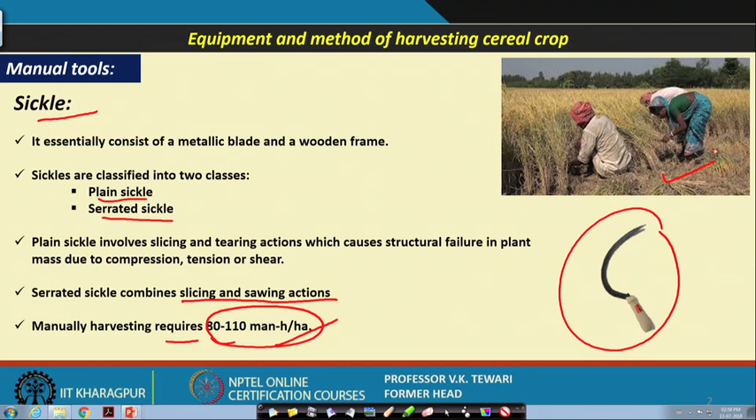That is why it was worth showing you here, and we have given a photograph of how the ladies and gents, how the people, in what posture they are operating. These are very arduous postures, but they have been used, and are still being used in some locations in the country and some other places.

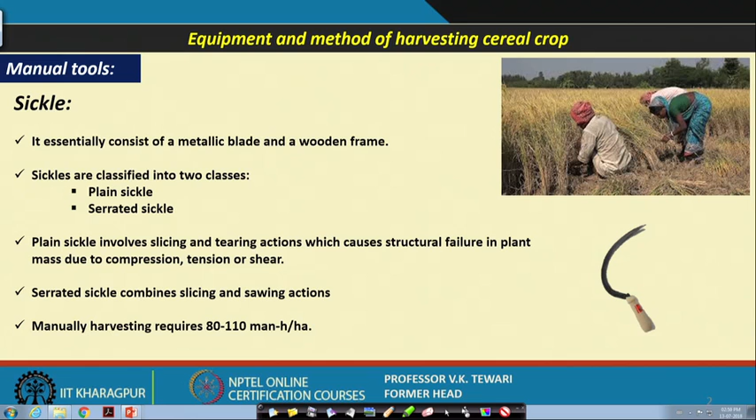This is mechanical equipment which I had shown you earlier, a device which saves a lot of energy. As I said, these tasks require very high energy if done manually, so that is why we have such equipment available.

Now, these reapers are nothing but reaping the crop. As you sow, so you reap, you must have heard. If you have a good crop, you are going to reap a good crop. That is why the name of this has come as a reaper.

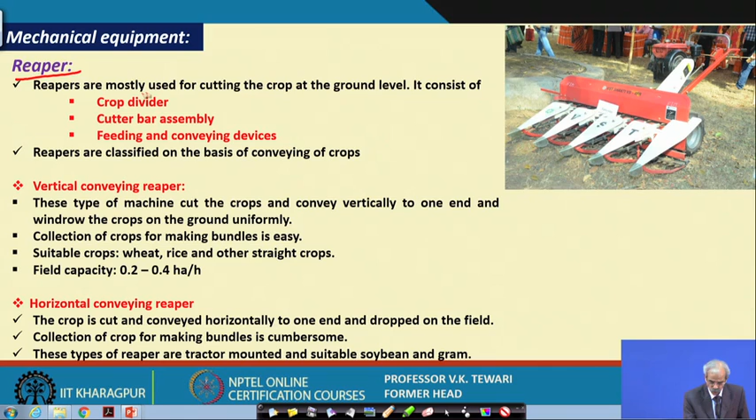You can see that this reaper mostly cuts the crop at ground level, very close to it. The details of this include a crop divider, a cutter bar assembly, and feeding and conveying devices. These are classified into two types.

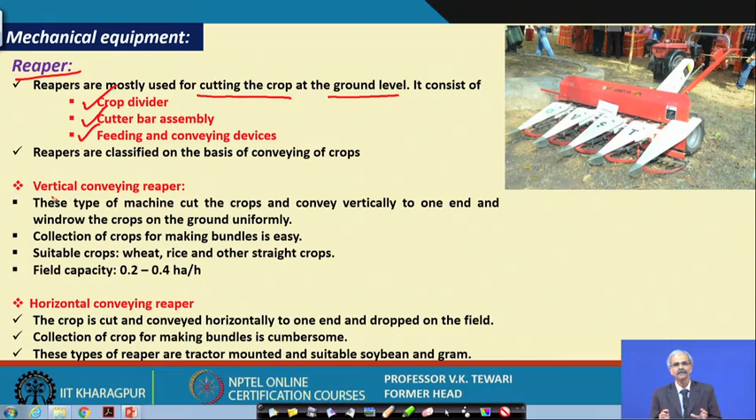When the crop is standing and it is cut, generally manually what we do after cutting is small bundles are made and put by the sides. So bundles are made and kept. This job is done by the people.

Here the vertical conveyor, after cutting, moves and windrows the crop. This is known as windrowing. So after cutting, it windrows the crops on one side of it.

This is called a vertical conveyor because the crop after cutting is conveyed in a vertical action and then falls on one side. In some other situations, horizontal conveying is also done. Some crops are bush type, for example soybean or gram, and these can be cut and horizontally conveyed. That is why there are two types of such reapers available.

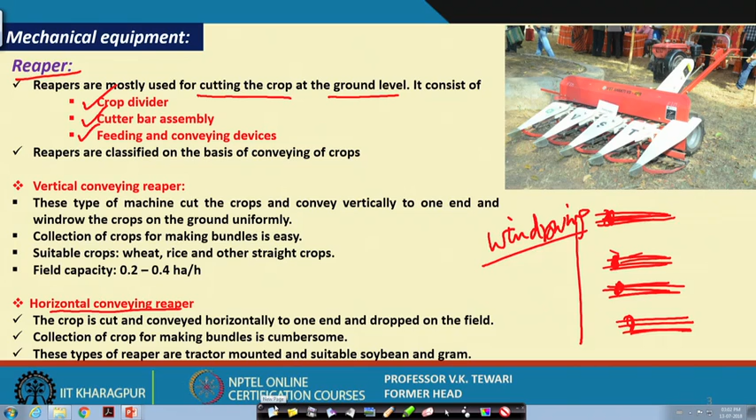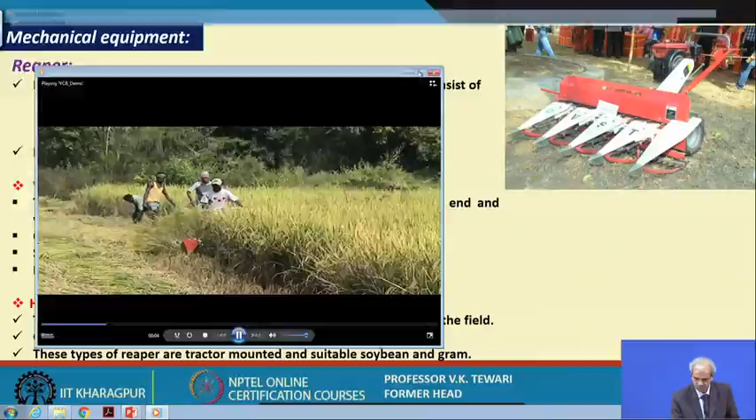Now we can have a look at the video of this, to see how it works.

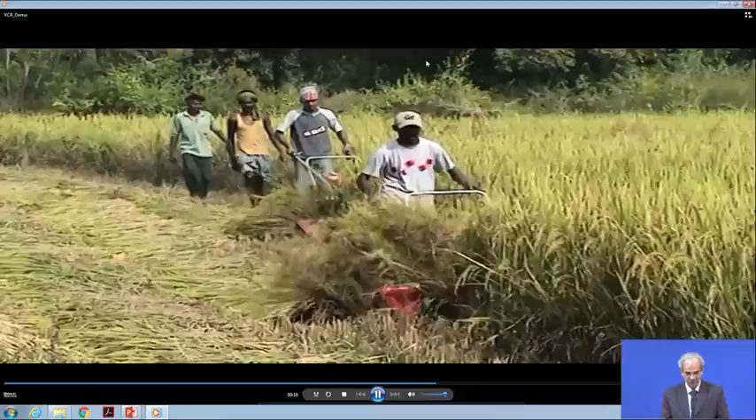The windrowing is going on properly, as we have said. You can see there are two machines being operated, so the work is faster. You can see here that two persons are operating, and they have been used effectively for so long.

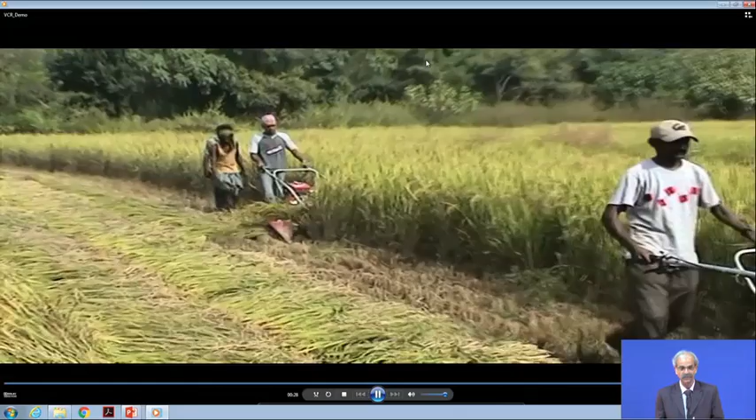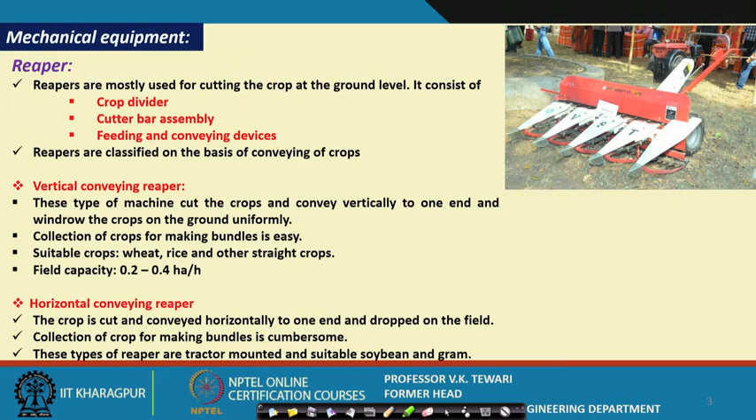Now, the problem with these is that they are just windrowing. There are devices where only windrowing will not do. We would like that after windrowing, small bundles are made, as it will be easier to collect and carry to the farmyard.

So the farmers expressed this need, and another machine came up known as the reaper binder. The field capacity, field efficiency, all details are given, and this machine simply does the job which was not done by the earlier machine. Although it has some weaknesses, it is still used extensively.

This will do the job of binding also, so the cost is slightly higher, but still if you have people, both machines can be used. Let us have a look at this as well.

Now, another one is the stripper harvester. Sometimes you must have seen the crop has a stem with grains on it. With a stripper, this portion is simply stripped and threshed, taken from the top, so when taken like this, the whole plant is left and only this portion is taken.

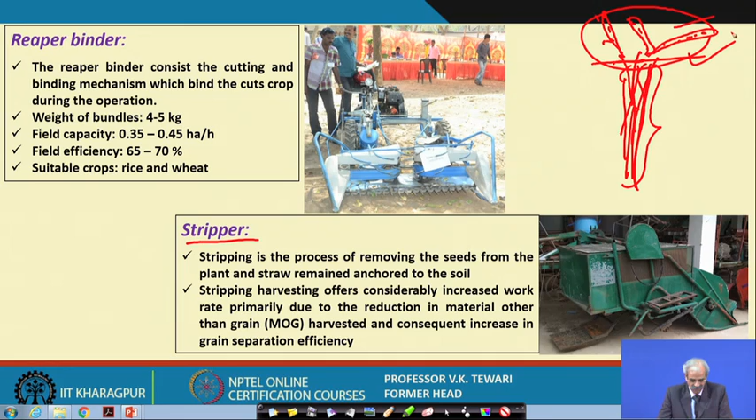Later on, these plant portions are cut and left in the field itself to conserve moisture. They are not very popular now, but this is another type of device available. We had one at IIT Kharagpur from the Philippines about 15 years back. These are known as stripper harvesters, which strip the cob parts where the grains are.

We will have a video of this reaper binder, so you can appreciate that after cutting, in the earlier case it was simply windrowing and not putting small bundles. This is done here, so let us have a look at this.

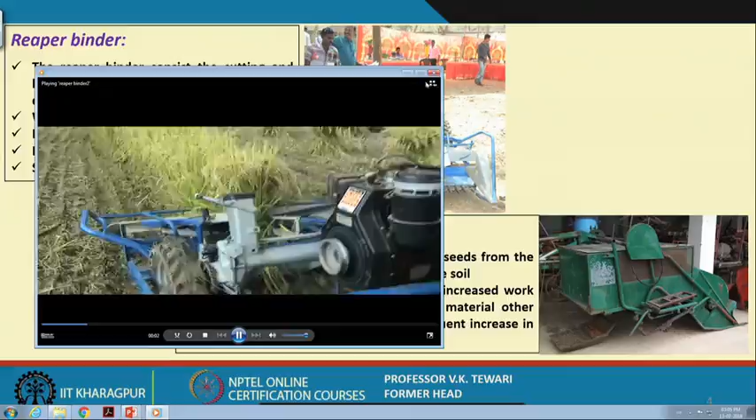Now have a look at this, how the whole thing is being performed. You can see the bundles being made here. If you see the back from this side, the bundles are being made, so it is easier for the farmer to collect these bundles and then transport.

This is one which is above that, and the cost is slightly more, but it is available in the market, and depending on the requirement one should go for it. If people are not available, you will have to go for this machine, because people are not available even for lifting. So these are the machines I said, particularly the reaper binder and the stripper, and they are also available and being used.

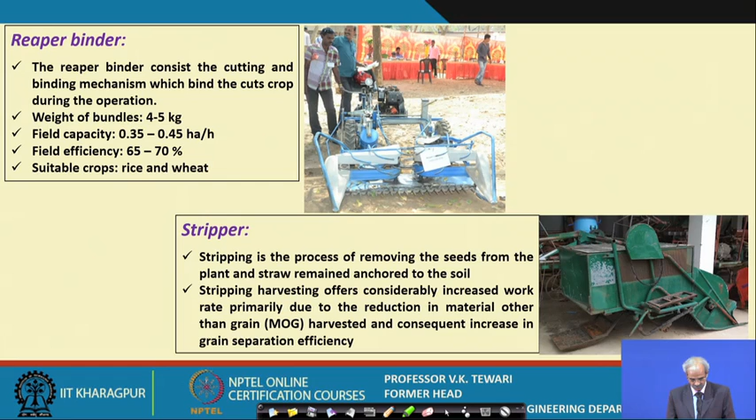Now for equipment for harvesting root crops. In the earlier two, we talked of cereal crops, and generally there were two types which are very important. Now when we talk of root crops, that means crops which are actually bulbs, just like potato, groundnut, sugar beet, and even carrot. They are all below the ground.

So when you need to harvest them, what are the things required? The root crop harvesting basically performs the following operations. Digging will be there, dug up to that level. You should dig it to the extent that it should not cut. If it is in this posture, supposing a carrot, and digging is at this location, then this much material will be left inside. So proper digging has to be such that the whole material comes out, and if potatoes are there, it must be below that, so that every amount of potato is taken up.

This is important. Then separating the loose soil from the small clods and stones. If this is the level at which the plant or the potatoes are there, then we have to cut it from here. All this soil should be removed from stones, so you get clear bulbs of potatoes or sugar beet or whatever, or weeds, and separating them in different sizes.

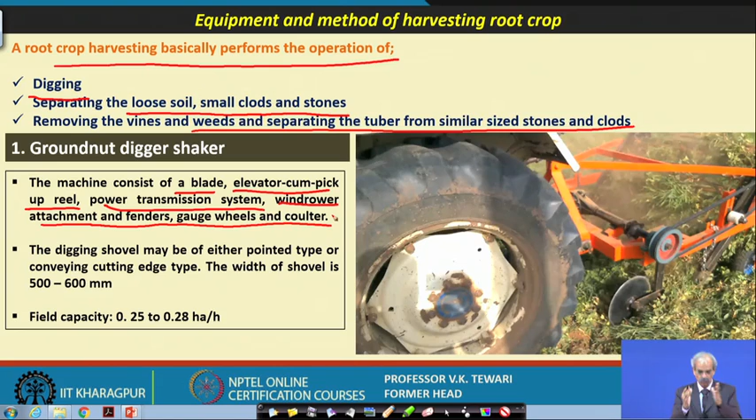Now the width of the shovel varies from 500 to 600 mm. This depends on the type of design you have and the power source that you have. You must try to match the requirement of the machine or the size of the machine as per the power. We will discuss in subsequent lectures how to match the power of the power source with the size of the equipment, which is very important, so that you can utilize maximum power of the power source.

The field capacity varies from 0.25 to 0.28 hectare per hour. So roughly within 4 hours or so, 1 hectare area you can do, and if you have to dig about 1 hectare manually, you will require many people, about 100 people or so, and this is a very strenuous task. So these are equipment which are already available. We will have a video of this and see how it works.

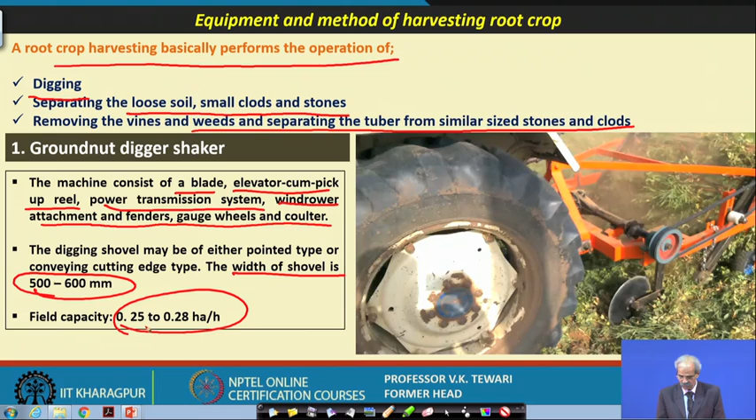Now, you can see how it works here. The whole operation is seen. This is the ground. You can see the bushes etc. are there, and then the whole thing will be picked up and maybe cleaned, and then groundnut threshers are available.

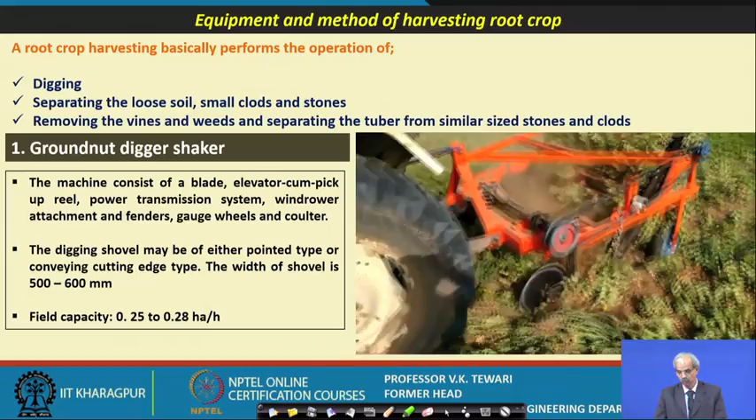We will talk of that when we come to that place, in that lecture, and those are then actually removed. So, this is the thing. You see the operation. You should appreciate the point of view. Yes.

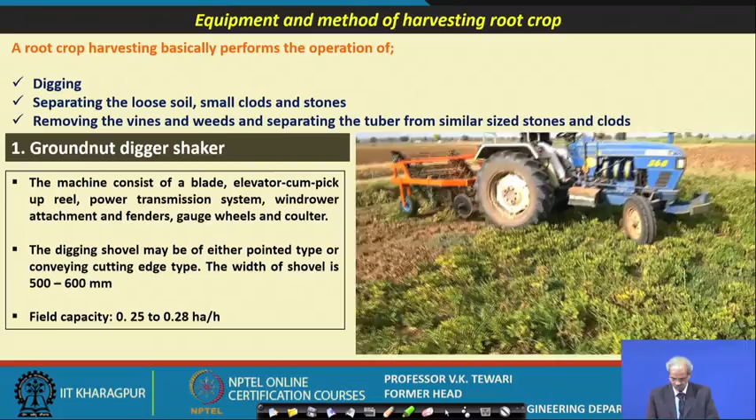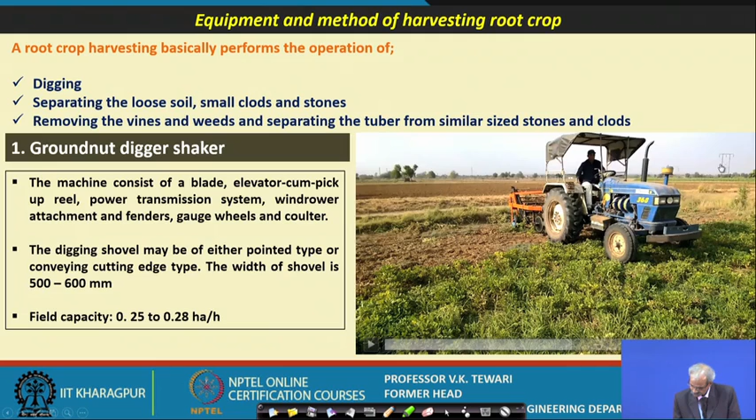Now, potato. As I said earlier, you can think of the groundnut similarly for potatoes. Manual harvesting of potatoes requires about 800 man-hours per hectare. It's not possible that you get so many people for doing this particular operation, and it has to be done at the right time.

Otherwise, you will lose the potatoes which are there, and many times we find that these potatoes, if they are not harvested, they have to be thrown, and even harvested potatoes, if they are not properly preserved, then after some time they lose their value. So, it is very important that they should be harvested properly, and they should be stored in the proper locations where they can be stored for some more duration of time.

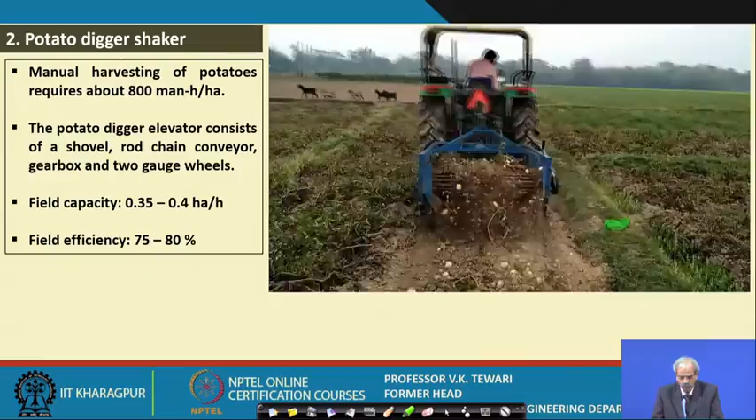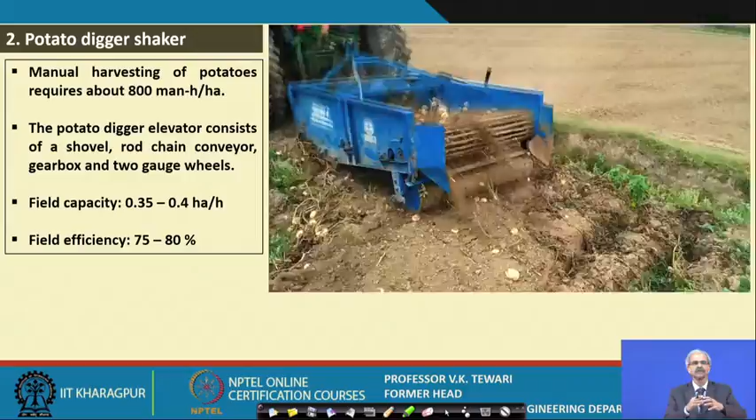Now here I must tell you that depending upon the capability of the person, a poor farmer may not be in a position to purchase these big machines. They are not very big, but now the concept of custom hiring has come up. A group of farmers can come together and purchase these machines and use them for their own requirement, as well as give them on rent and earn some more money. The field efficiency of such machines is about 75 to 80%. So, these are some of the devices which are being used, and they are worth having.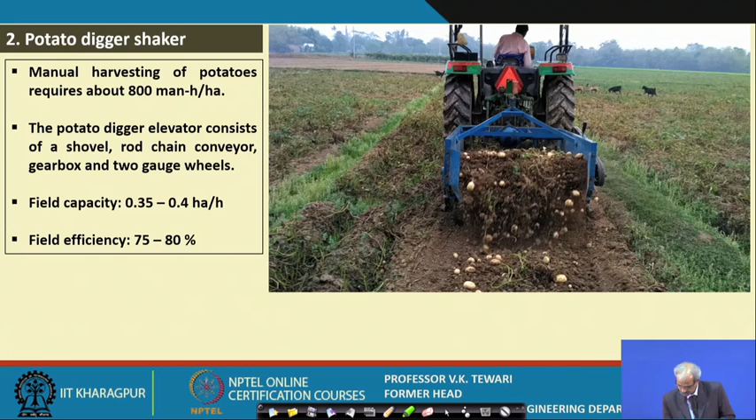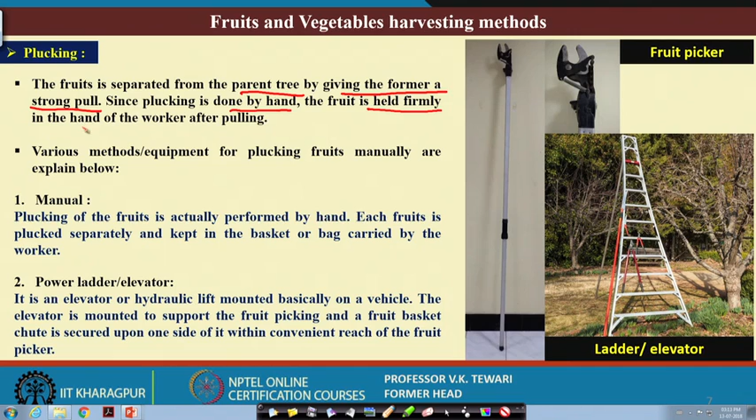Fruits and vegetable harvesting mechanisms and methods. As I said, plucking is important here. The fruits are harvested from the parent tree by giving a strong pull. So, the plucking is done by hand. You can see that the fruit is held firmly in the hand of the worker after pulling. Otherwise, it will fall on the ground.

Once it falls on the ground, the fruit is spoiled, because physically you may not see it at that point of time, but the inside tissues get hurt, and after some time, when the temperature and relative humidity conditions are not favorable, it will start deteriorating, and if you cut the fruit after that it will not be fit to be eaten. So, this is difficult.

Similarly, manual plucking of fruits is performed by hand. Manually, you can pick up each and every mango. People go into the tree and pick up the mangoes and carry them in their small bags. This is one way, but how do you get so many people? It's not possible. So, various types of ladders have been made, as you can see here.

We showed here earlier this device, and you can see that with this particular device, people can go onto it and reach that location. As I said, tractor drawn platforms have also been designed and used. You might have seen them at some locations, and these are available for plucking of these fruits. Sometimes, by shaking also we try to take the fruits.

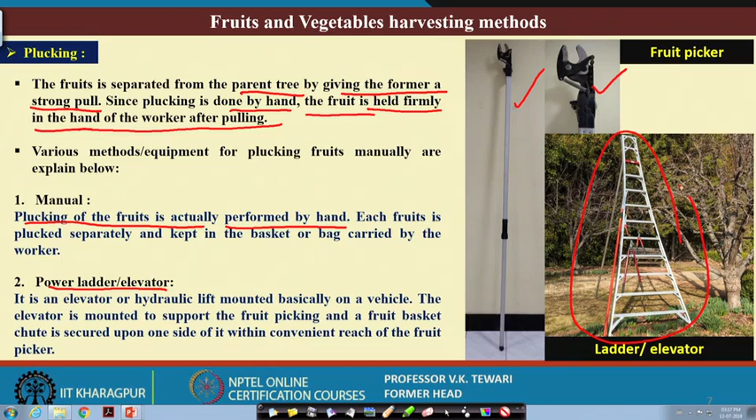We have talked of fruits and vegetables. Vegetables should be as fresh as possible. So, maybe you can have e-carts where you can cut or harvest the vegetables which are available, put them in e-carts, and then take them to the market, or store for a day or so and then take them to the market, depending upon your requirement and the requirement of the market.

And many people have done this. In fact, people are making good business out of the e-carts which have been designed for fruits and vegetables. People are growing organic fruits and vegetables, and they are using such devices which are available to them.

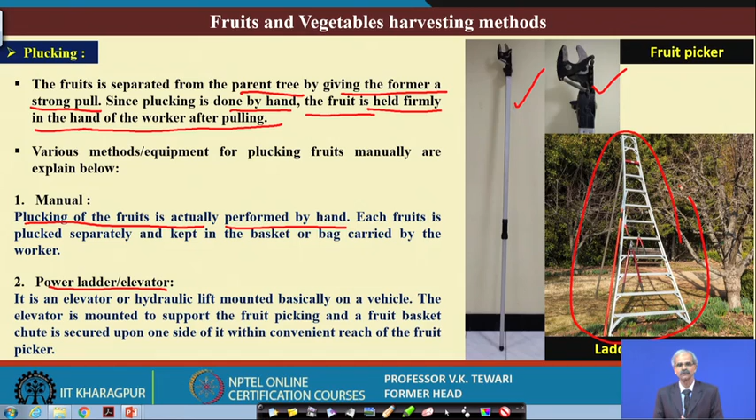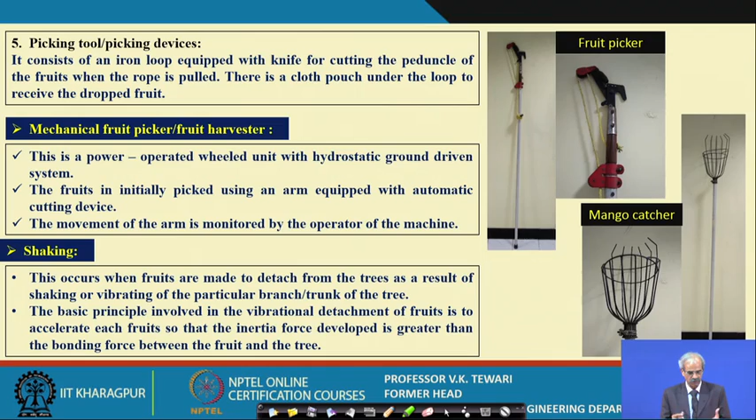Well, these are the devices which we were talking of, for mango. You can see here that a catcher is given, the fruit picker, and another device. Now, mechanical fruit picking, fruit harvester, shaking, as I told you, all these devices I have already described. We have given you here some write-up which will help you in understanding them instead of hunting anywhere else. When you go through this video, you will have this material with you. If you require more details, you can go to books or other literature.

We have picked up a problem for you, so you can see how these are used. The problem is: a vertical conveyor reaper with 1.4 meter width travels at 1.5 kilometer per hour. Loss of time proportional to area equals 1.5 hour per hectare, primarily due to turning and adjustment of the machine. If the other losses are neglected, calculate the actual field capacity of the machine. A very simple one, but it makes you think how you will go about it.

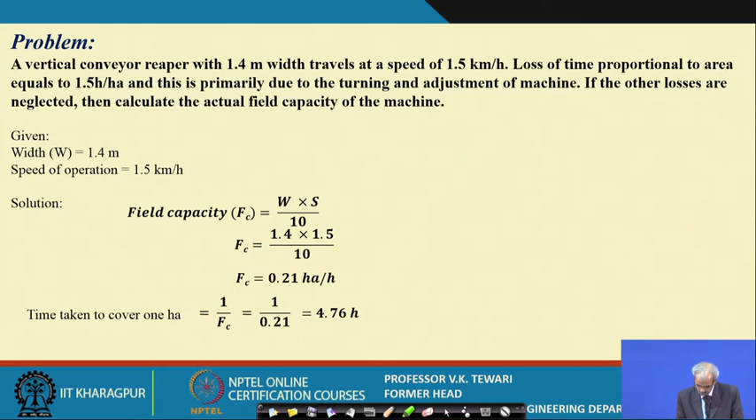The field capacity is W S by 10, where W is the width of the machine in meter and S is the speed in kilometer per hour, which gives field capacity in hectare per hour. Using this you will straight away get this, and the time taken to cover 1 hectare is 4.76, just the reverse of this. Now, you have been given that a certain amount of time is lost. So, field efficiency is based on theoretical time.

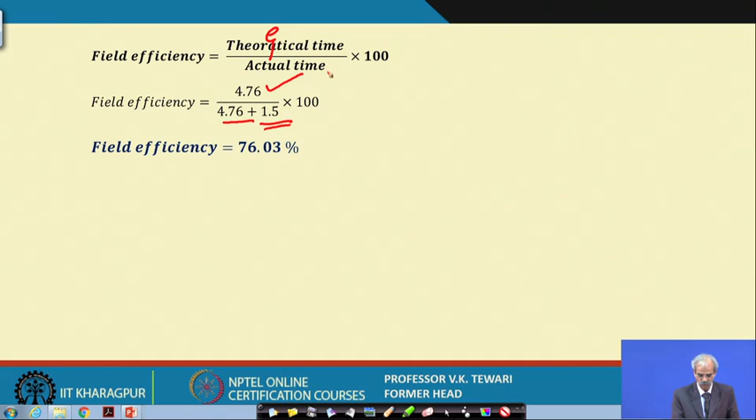Now, there is a mistake here. This is E, theoretical time by actual time into 100. The theoretical time we have worked out, but the actual time will add up the time which has been lost, so you must add this. Once you do this, you get the actual time. So, with actual time and theoretical time, the field efficiency is this. This is what was asked of you.

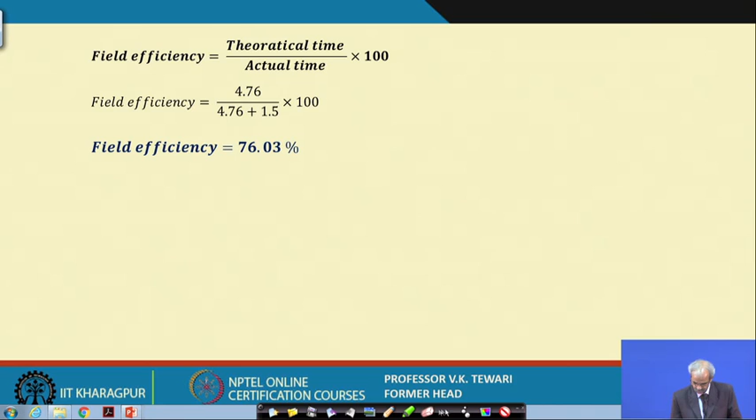Now, another problem has been taken to make it slightly more clear. See, a living alfalfa stem of 2.5 millimeter diameter is loaded horizontally at a distance of 30 millimeter above the soil surface as a cantilever beam. Now, based on the entire stem cross section, the modulus of elasticity is given as 1500 Newton per millimeter square, and the ultimate tensile strength is 35 Newton per millimeter square.

Now, we need to calculate the horizontal force that would cause bending failure and calculate the horizontal deflection of the stem at the point of failure. So, very good problem. It will bring your knowledge of the strength of materials, and the formulae which we have already given in this respect of cutting and bending forces required for the plants and the structures which we gave earlier. So, we have utilized this over here.

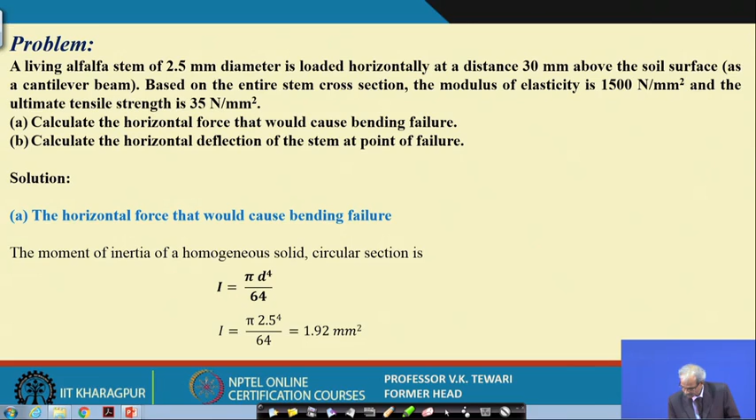You can see here, this is the one which is given for solid and circular section. So, for moment of inertia. Now, moment of inertia is found out from here. D is the diameter of the stem of that plant. This is known. Then what was the formula? If you go further, you will see the formula. Now, this is the formula which is used.

This is the formula which is used here, where SU is the ultimate strength of the plant fiber, which is already given. Then I you have found out from that side, and C is the radius from neutral axis, which is very important here. And L is the distance from concentrated load to point of support. These values are given in the problem itself. So, you can put these values here and get FBU.

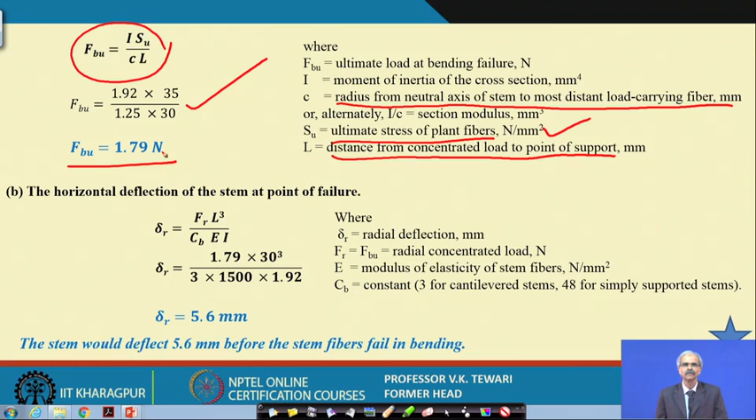Once you have got this, then horizontal deflection of the stem at the point of failure. When the failure takes place, what is the horizontal deflection which has taken place before the failure of that plant, which we had discussed earlier, that initially there will be energy for compressing it, first compressing and then cutting and then final cutting. So, before the cutting takes place, failure takes place, what is the level of deflection? We use this particular formula which has already been given to you.

So, we get all these values of radial deflection, then the FBU is nothing but the concentrated load, this one here. And modulus of elasticity of that material is known. So, using CB for a cantilever beam, it was given to you. It will be behaving like a cantilever beam. So, for that CB is equal to 3, and if it is for simply supported beam, the value will be 48. So, using this we are getting that this is equal to 5.6.

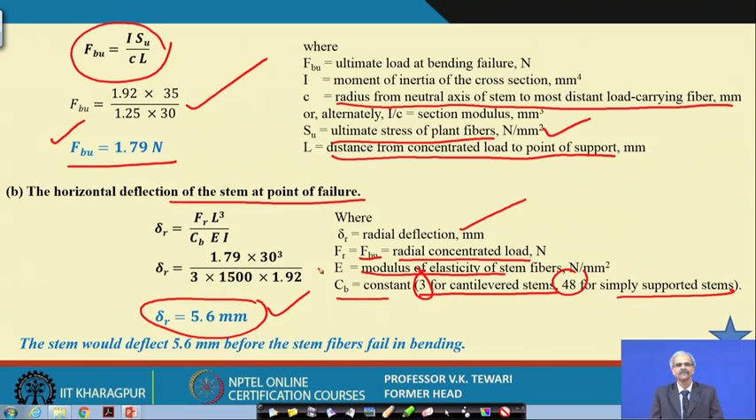So, then in this particular lecture what have we talked? We have talked of the root crops, the cereal crops, and then fruit crops, and what are the various mechanisms available, and then through two small problems we wanted to illustrate some of the concepts which we have given over here. Now, we will advise you that you go to the literature or go to the books if you are interested and know more about it.